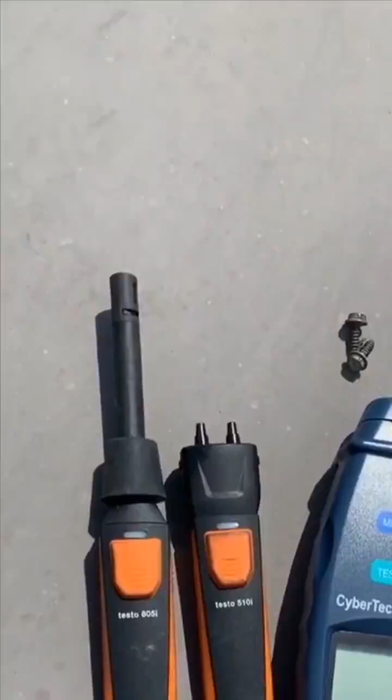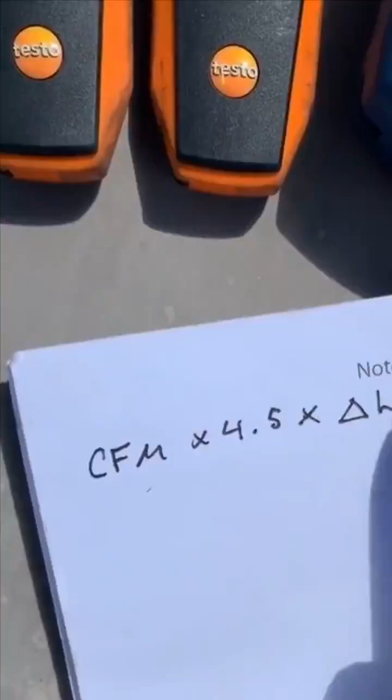Had some extra time on this maintenance, so I decided to check the efficiency of this unit. Pretty much what you're going to need is a psychrometer, manometer, and tachometer. You're also going to need to remember this formula: it's CFM times 4.5 times delta H. This is called the total heat formula. Then you're going to have to install some test ports into your return and supply duct.

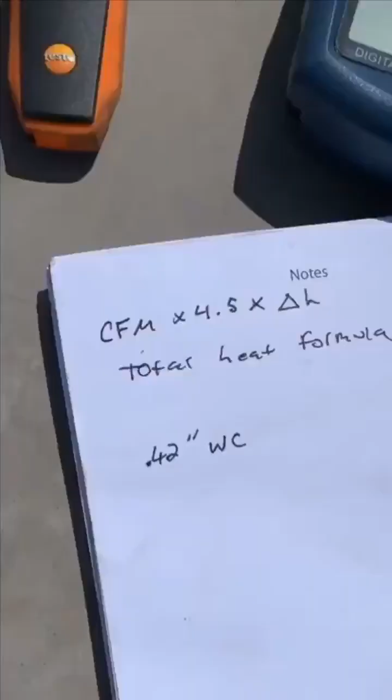Don't forget to put at least some tape over it. Then you're going to use your manometer to get your total external static pressure and then note your reading. I got 0.42 inches of water column. Next, you're going to get your psychrometer and measure your wet bulb at your return and your supply.

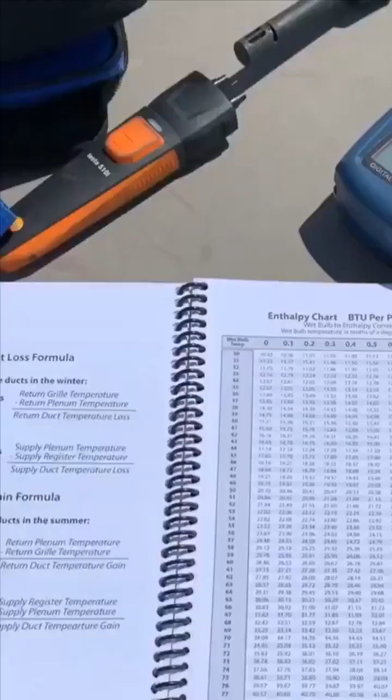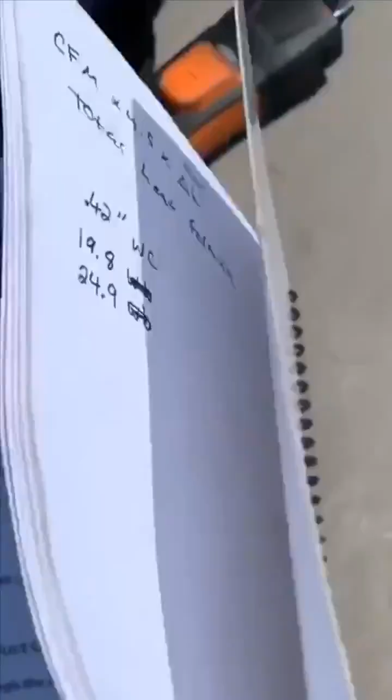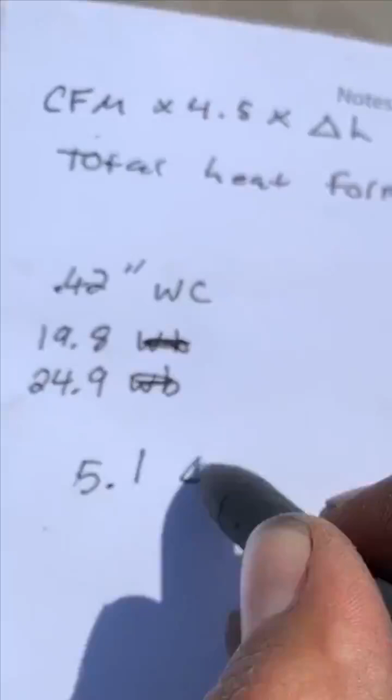So now you get your wet bulb temperature readings and you use an enthalpy chart to convert it from wet bulb to enthalpy. So my readings came out to 19.8 enthalpy and 24.9 enthalpy. So the difference between that is 5.1. So that's your delta H, which just means difference in enthalpy.

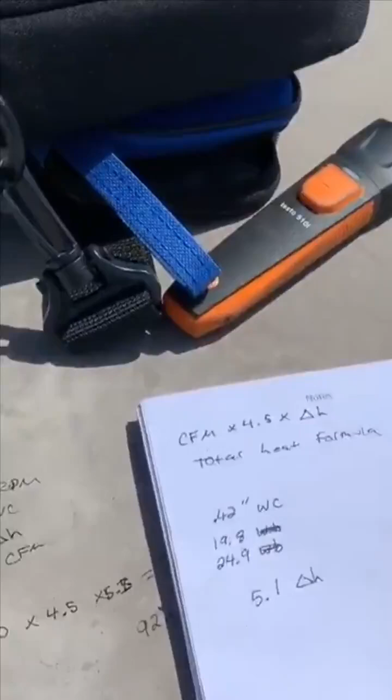So now the next thing, you have to get fan CFM. So you have to get your tachometer and you get a piece of reflective tape, put it on the blower shaft, and then you measure the RPM, which I got 1105 RPM.

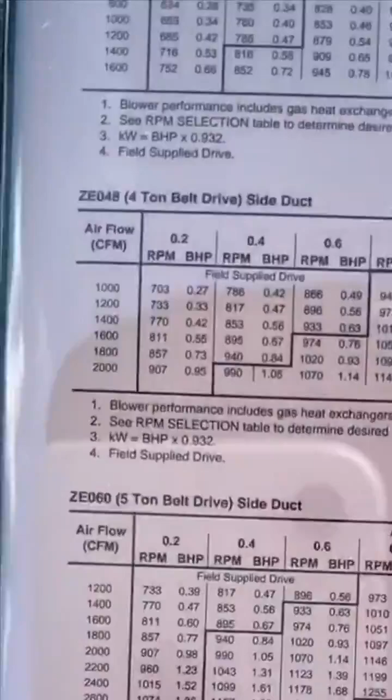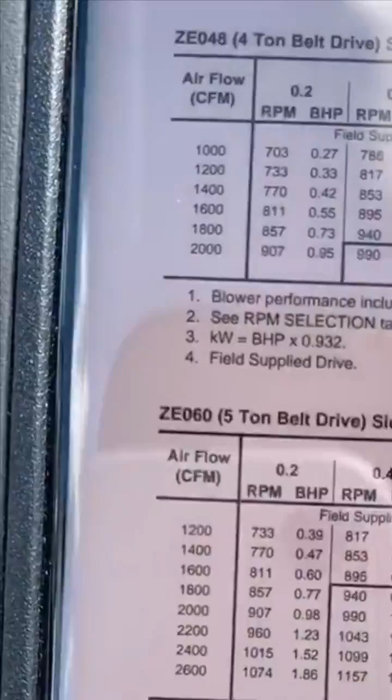So now you have to find your manual and look for the blower table for your tonnage, and you use your static pressure and RPM that will convert it to CFM. I got 2400 CFM, so now we could use the total heat formula.

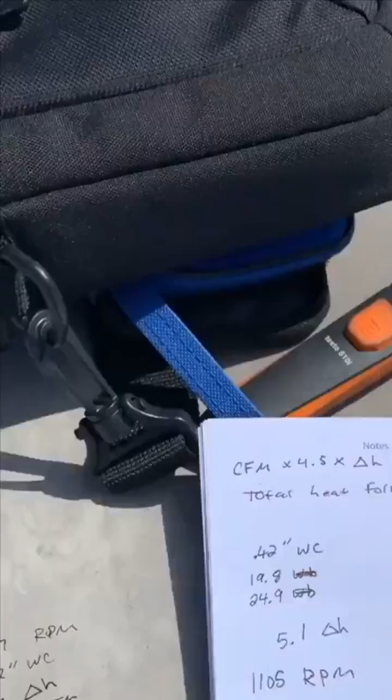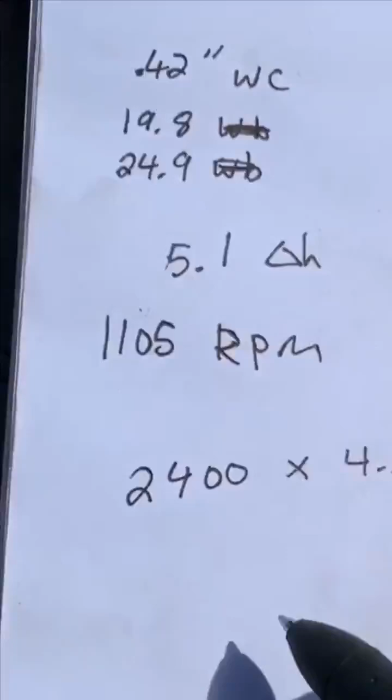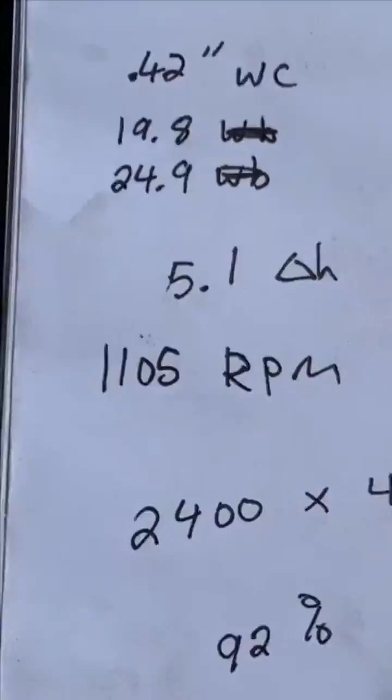Which is 2400 times 4.5 times 5.1, which equals 55,000. So 55,000 out of the 60,000 rated BTUs is 92% efficiency, which is actually really good. I know it seems like a lot of work, but if you have the tools, you have the formulas, if you have the knowledge, it'll only take you like 10-15 minutes.